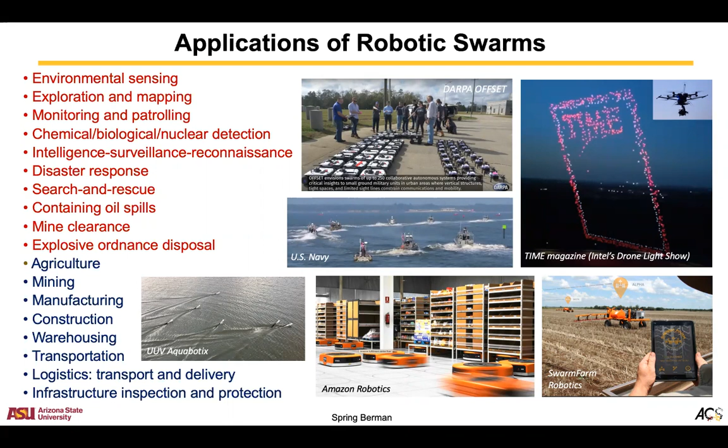Given that there's a number of possible uses for robotic swarms, the problem that we consider in my lab is how do we control them in a way that's scalable, meaning it doesn't get more complex to control the robots as the number of robots increases, and how can we ensure that their performance is reliable and that they perform the expected collective behavior.

So we consider scenarios with various challenges. Oftentimes a swarm will need to operate in denied and inaccessible environments - environments that can't be instrumented, that lack access to GPS, and that have possibly limited communication bandwidth and frequent communication dropouts. Oftentimes the robots will not have prior data about the environment that they can use to help them navigate. Some examples of such applications might be underwater, subterranean, moving through dense urban environments, search and rescue, disaster response.

Another challenge is that we want the swarm to perform robustly in the presence of robot errors and failures, and we want them to often operate over long timescales. Meaning that even though some robots might fail, there's uncertainties and stochasticity in their environment, we still want the swarm to persist and complete its mission.

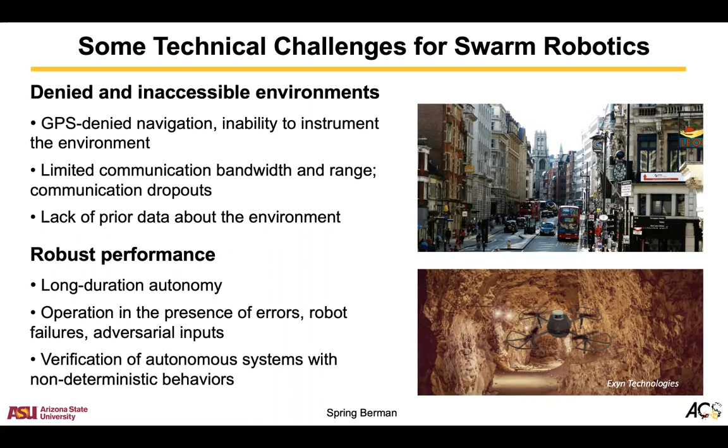So given these challenges, we often look to systems in nature which have overcome these challenges to perform complex tasks as collectives. There are many examples in biology of swarms, for instance, of social insect colonies like ants, honeybees, some species of termites.

We also see behaviors like flocking and schooling, where the individuals display this coordinated motion even though there's no leader that's telling them where to go. And even in embryonic development, in the organization of cells within a developing organism.

One thing that many of these natural swarms have in common is that the individuals in the swarm behave in what's called a decentralized manner. So they are just responding to local information that they gather via sensing or possibly communication with their neighbors.

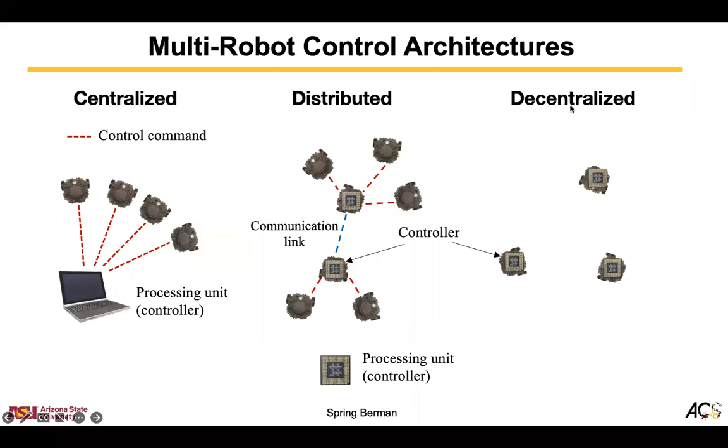You can also have distributed and decentralized strategies, which are more suitable for large numbers of robots, in which robots may be locally controlling sections of the swarm and communicating with each other, or each robot is just using its own onboard computer to decide what to do next in a completely autonomous fashion. We often use this decentralized architecture to ensure good scalability for large numbers.

In terms of communication, many existing strategies rely on some guarantees on connectivity among the agents in terms of their communication network. Most of our strategies don't rely on that. In nature, you don't often see a continuously connected communication or sensing network.

So sometimes we will rely on local sensing or local communication, so the communication or sensing network is changing over time as the robots move around, and they're just communicating or sensing within a local range. Or many of our strategies don't use any communication at all.

One way in which robots are not like individual members of a natural swarm is that we can instrument them with various sensors, and so we want to take advantage of that. In cases where it's possible, we might also want to take advantage of an overhead view of the arena in which the robots are performing.

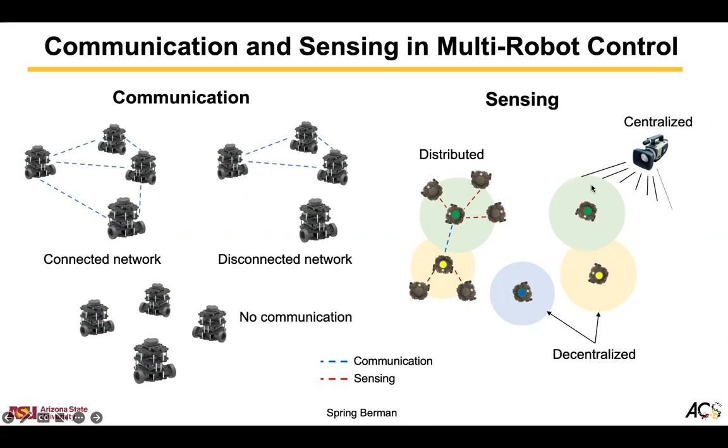I'm going to describe several different applications for swarms for which we've designed control strategies. These include spatial coverage by the swarm, including interiors and boundaries of regions of interest; task allocation of the swarm among a set of tasks, where our strategies are closely related to those for spatial coverage, as you'll see; sensing and control, where possible, of environmental fields; collision-free navigation; mapping obstacles and features of interest; and finally, collective payload transport.

So I'm going to start with the first three, and for these three types of applications, we use a multi-level modeling method that enables us to control the density of the swarm over space and possibly time.

So when they encounter a robot that's carrying a compatible piece according to the plan, they will stochastically decide to combine their pieces until they have one of two full assemblies, which they then drop on the ground.

We can consider this a well-mixed swarm in the sense that the density of robots and parts is spatially homogeneous. Because we can have an arbitrary number of robots and parts, we want our control strategy to be scalable.

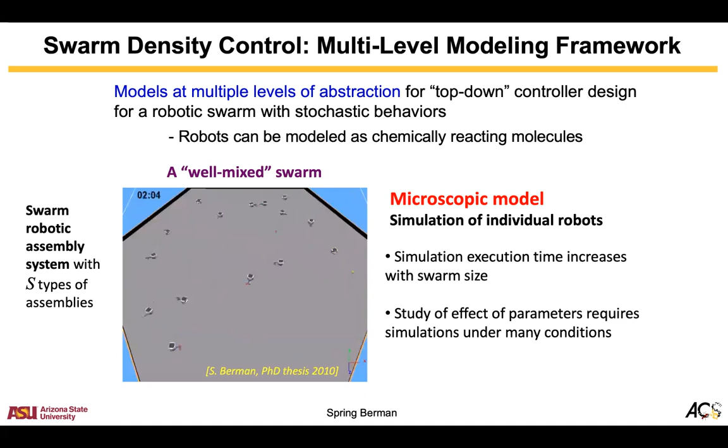If we look at a model of individuals, referred to as a microscopic model, working with that model involves increasing simulation times with increasing swarm size, and changing parameters requires simulating under a lot of different conditions, and you don't necessarily get theoretical guarantees using that type of analysis.

So instead, using the abstraction framework enabled by the control policies defined by the robots, which act similarly to chemically reacting molecules, we can abstract the swarm of individuals to a continuum given by a set of densities, each describing the density or probability density of a different type of assembly or the robots over space and time—in this case, not space, because we're modeling this as spatially homogeneous—but we can describe the evolution of these densities according to what's called a macroscopic or mean field model.

This is going to be independent of the swarm size, and of course we can apply different techniques of analysis, control, and optimization to such a model. That's going to allow us to design control policies for the individual robots.

So of course, not all swarms are going to be well mixed. We might want to model the spatial distribution as well as the distribution over time. In this case, we can model the density fields as functions of space and time, and these will evolve according to a set of partial differential equations.

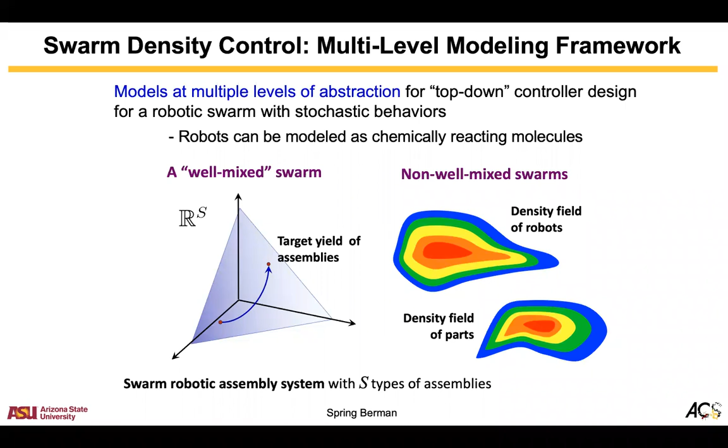This approach involves modeling at multiple levels, both the individual robots and modeling them as a continuum. We can use this for control by applying our control techniques to the macroscopic or mean field model, and then mapping the parameters onto the robot controllers.

So in this case, the design parameter is K, and we can design K for some objective. Oftentimes we're designing it for a target density field of robots at steady state, or a target density field of some other quantity.

This abstraction framework allows us to use the guarantees at the macroscopic level in order to ensure that, in expectation, the swarm is going to perform according to the evolution of the macroscopic model, which we can design via its parameters.

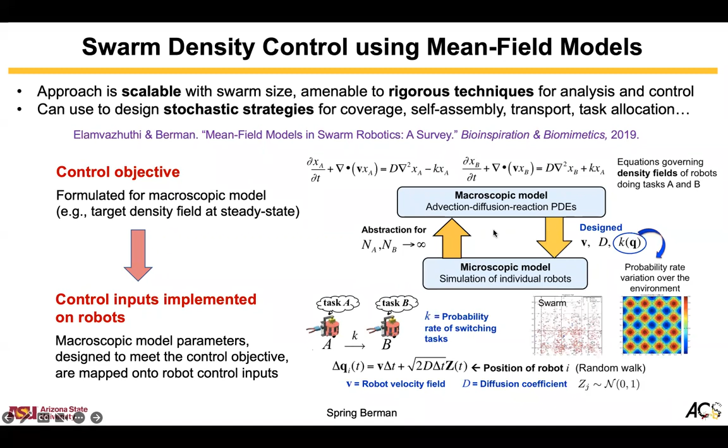Now we have these additional parameters, the velocity field and possibly the diffusion coefficient, if we can control the random behavior, the random motion of the robots. In some cases, it might just be inherent randomness in the motion that we can't actually adjust.

If we look at the mean field models, we can ensure the swarm performance by guaranteeing various properties of these models mathematically. Two of them that we consider are controllability and stabilizability.

Controllability refers to the property that the system is controllable if, given an initial condition X naught, in this case a differential equation model, ordinary differential equations, for every desired final state there exists some control input U such that the solution to this ODE model satisfies these conditions. You end up at time t at your desired end state, which again is going to be some desired distribution of robots among different states.

Stabilizability refers to the property that the system is stabilizable if, given some desired steady state distribution XD, there exists a map K such that in the closed loop system that state XD is asymptotically stable.

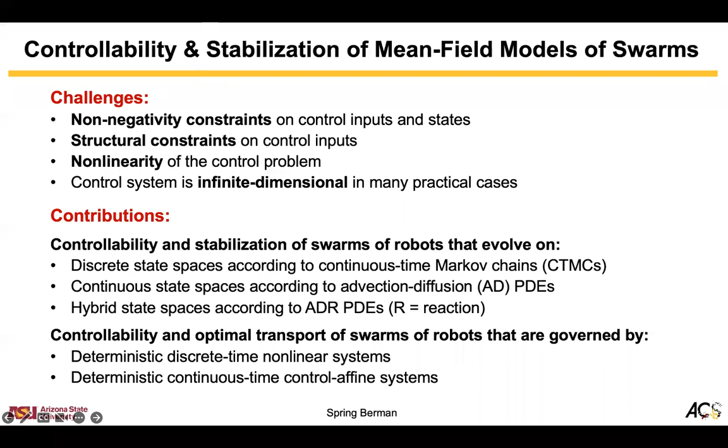So we've looked at a number of scenarios of robots that evolve on discrete or continuous spaces, just switching tasks according to continuous time Markov chains, or evolving over time according to advection diffusion PDEs. We've also looked at swarms of robots governed by different types of dynamics, and looked at the controllability and stabilization, proving those properties for those swarms. This is also summarized in that survey paper I mentioned earlier.

Okay, so given this overview, now I'll talk a little bit about our approaches to spatial coverage and task allocation that are based on the mean field model. So in this scenario, we have a swarm of robots that has to redistribute itself among a set of tasks, or alternatively, you can think of them as distributing among a set of spatial locations, discrete locations.

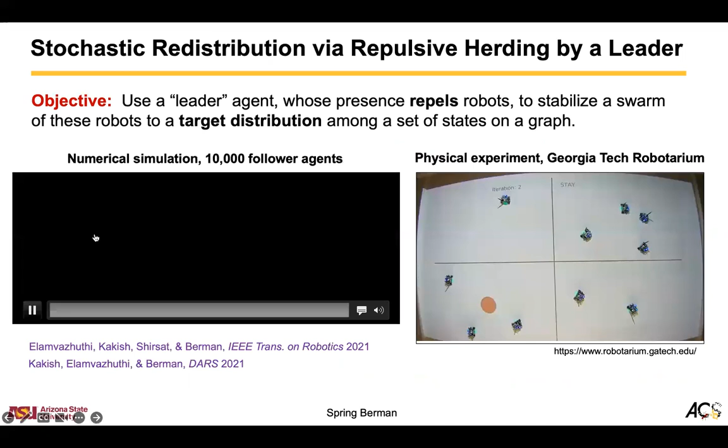So here are a couple of movies that show this strategy. On the left, actually in both cases, the leader is this dot, this red or orange dot, and it's moving across the graph, and the robots that are in its current square will then probabilistically flee to one of the neighboring squares. And over time, you can design the leader's transitions to herd the swarm into this target distribution. And so we've also used reinforcement learning techniques to design the leader's transitions in the work on the right.

Okay, so far we've looked at scenarios where robots are spontaneously transitioning between different states. But we can also describe or formulate mean field models that describe interactions between robots and each other, or between robots and some object of interest in the environment.

So we've also looked at designing stochastic control policies for boundary coverage, in which the goal is to design these probabilities of attachment to the boundary of a region and detachment from the boundary, given this catalyzing nearby robot, such that in expectation we get a target steady state density of robots around the boundary. And so if the robots recognize different types of boundaries, you can program in different reaction rate constants in order to get different coverage densities around those different regions. This kind of looks like an enzymatic chemical reaction network, so this is another possible task that can be programmed using this chemical reaction network mean field model framework.

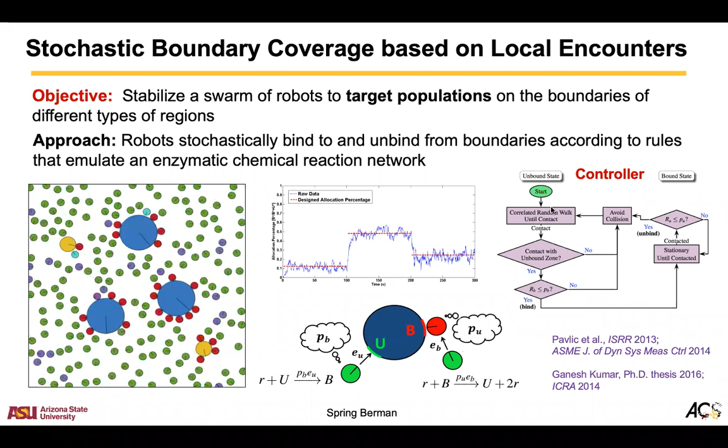Okay, so now let's add some spatial evolution to the swarm. We're going to consider cases where we have this spatially inhomogeneous swarm that's evolving over time.

In this case, the agents are diffusing, and we're modeling a swarm of nanoparticles that are moving or diffusing into a section of tumor tissue.

There are a set of reactions that govern how the nanoparticles behave, in that they will attach to the receptors in these tumor cancer cells, and they can also detach, and they can be internalized. Once they're internalized, they can release their chemotherapy drug.

And if you have a sufficient number of internalized nanoparticles in the cell, then the cell will be killed. So you can formulate this as a reaction diffusion set of equations that describe the nanoparticles in their different states.

And you can design an optimization problem to design a particular parameter, which would be something that you could design for the nanoparticles in order to control their binding rates over space, such that you get a target number of internalized nanoparticles in each of a line of cells.

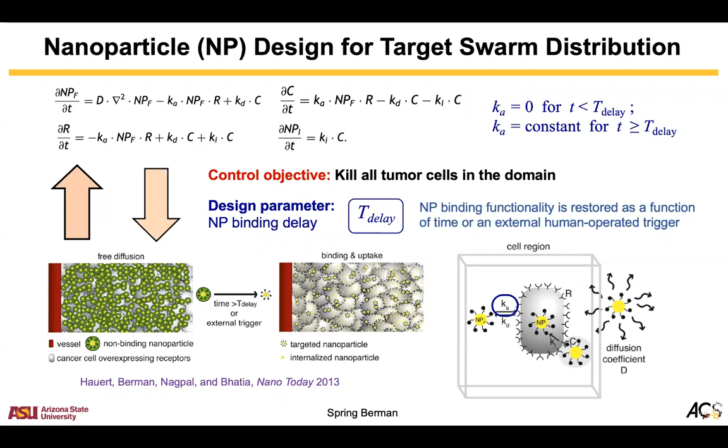So this is another type of problem. We can control the spatial distribution of agents over a domain.

We've also looked at applying this mean field control framework to sensing and control of environmental fields. I'll talk about a sensing problem first. In this scenario, we have a scalar environmental field.

And we have robots that can take sensor measurements at their location of the value of that scalar field. So we want the swarm to stabilize to a target density where that target density is proportional to the scalar field. And so we're going to design the robot's diffusion coefficient, and we can define it simply as proportional to the inverse of the field.

So as the swarm disperses, it's going to measure the field, and then it's going to control its random motion, such that if the field is higher, they're going to move slower. If it's lower, they'll move faster. And so they're going to end up aggregating at hotspots in this field. Overall, the steady state distribution of the swarm is going to, in a sense, reveal the underlying environmental field.

And this was also done as superimposed trials because we didn't account for inter-robot collision avoidance, which of course we'd have to do in practice. But using just a single robot, multiple trials, we could show that this control strategy performs as expected.

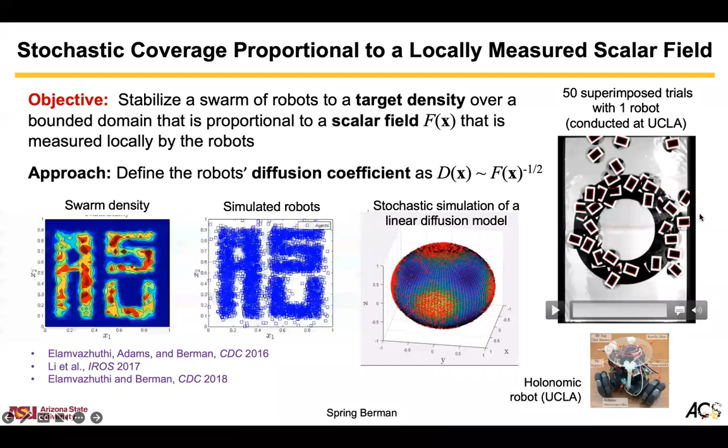So we can also think about scenarios where the robots are producing some activity and we want to control the distribution of such an activity. Maybe this is something like sensor measurements, or in this particular case, it's pollination activity.

So here we imagine a swarm of robotic bees that are deployed over a crop field. The field has different rows with different cultivars or varieties of the crop. And so we want to control the spatial distribution of robot visits to flowers within these crops.

Maybe in rows one and row two, we want different levels of pollination activity. So we can design the robots to have this reaction-like effect on visiting. They have some rate of hovering, deciding to hover at a flower, which depends on the type of flower. And once they hover, then we can record that as a robot visit, which affects pollination.

Then they can transition from hovering to flying at some rate k-fly. And we also model their motion as a combination of a controllable velocity field, which can vary with time, and some uncontrollable random motion. And so we can formulate an optimal control problem to compute the velocity field and their rate of hovering.

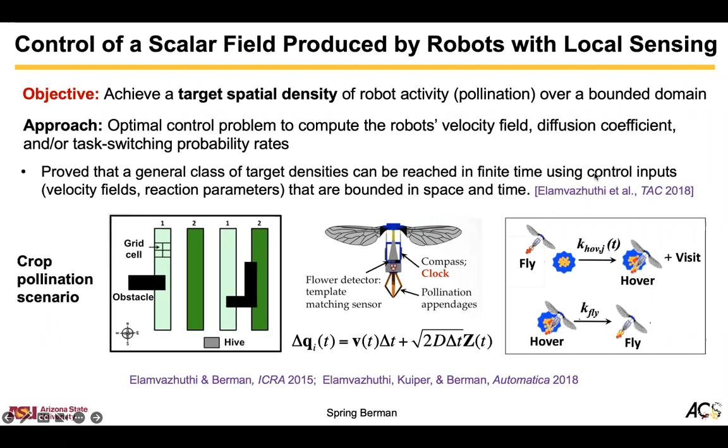So here's an example of two different target steady state densities of flower visits. In the one here in the middle, we want a uniform pollination across all the rows, but there's two different desired densities of pollination between rows 1 and 2. And on the right, we want only the rightmost two rows to be uniformly pollinated.

So these, you can see that they don't exactly go to the desired distributions because there's some fluctuations in the density. This is typical of these stochastic control strategies. The idea is that if you ran a number of trials and then averaged the resulting densities, they should follow the solution of the corresponding mean field model. But they do give a lot of versatility in terms of the outcome by just changing two parameters of the robot's controllers.

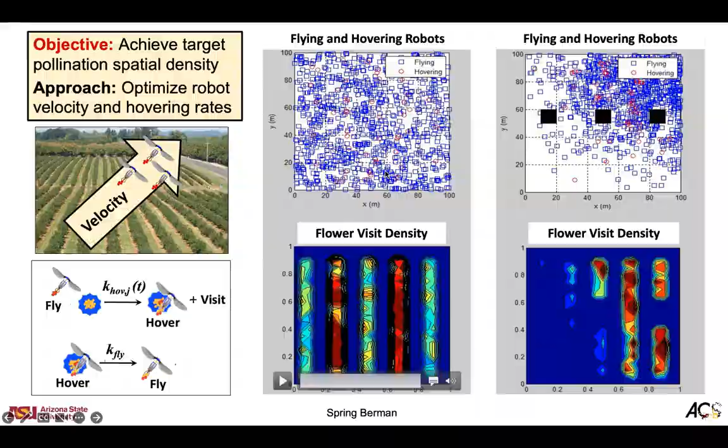And then finally here, we have some more recent work on the case where you have a swarm of robots that's indirectly affecting an environmental field. You're trying to control parameters of the robots in order to achieve a target environmental field, or target spatial density of the field, a target profile over space. In this case, we're envisioning an underwater swarm with onboard actuators that act as a source in the field, so they can locally increase the field, and we can control the source intensity as well as the robot's velocity.

And so we showed that you can indeed control the field in order to achieve various outcomes. For instance, regulating the density of the field in the event that without control, the field would just diffuse to zero everywhere.

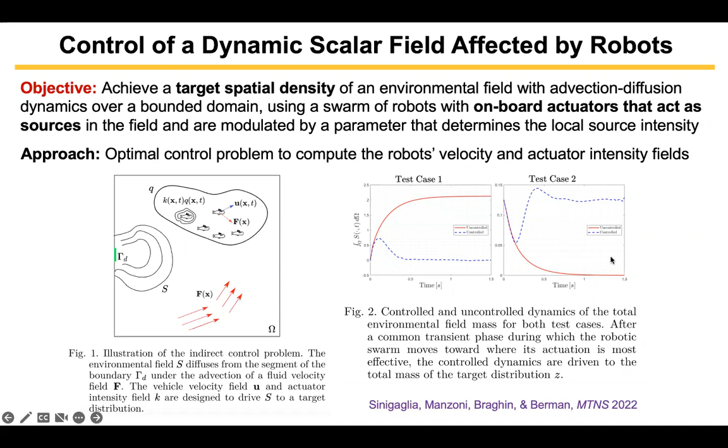As I mentioned, there is going to be some fluctuation around the expected mean field model solution. So we've done some investigation of quantifying the error between the mean field model that we're using for control and the microscopic model, the densities that evolve from that model. This was done with our colleague, Andrea Bertozzi, and her student. We looked at how we could, for instance, choose the number of robots and their sensing radius to achieve coverage, like in this pollination scenario, within a specified error. Here we're trying to account for the fact that there is a discrepancy between the mean field model and the microscopic model, and trying to potentially minimize that with the design of our swarm size and their sensing radius.

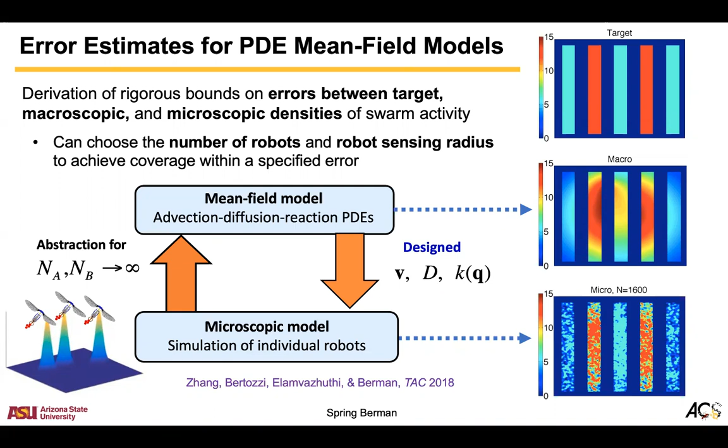Okay, so next I'm going to talk about collision-free navigation. Now we're going to move on from the mean field model description to other methods of optimization and control. We're going to be directly controlling individual robots here, rather than controlling a continuous density field.

We've looked at various problems of robots that need to navigate through an unknown environment in which there might be obstacles. Some of our strategies employ what are called potential fields that are constructed to enforce a kind of attractive or repulsive effect on robots that changes with their distance from the obstacle, and potentially from the goal point. There's been work on what are called navigation functions that are defined over a known environment that can produce these potential-based control laws.

Here, we're considering a case where the environment is unknown. We just know that the obstacles are convex, the environment is unbounded, and we want the robot to attain a target velocity while avoiding the obstacles. We also don't want it to get stuck between obstacles. So the robot has no GPS. It can measure its own velocity heading and its minimum distance from obstacles in its local sensing range.

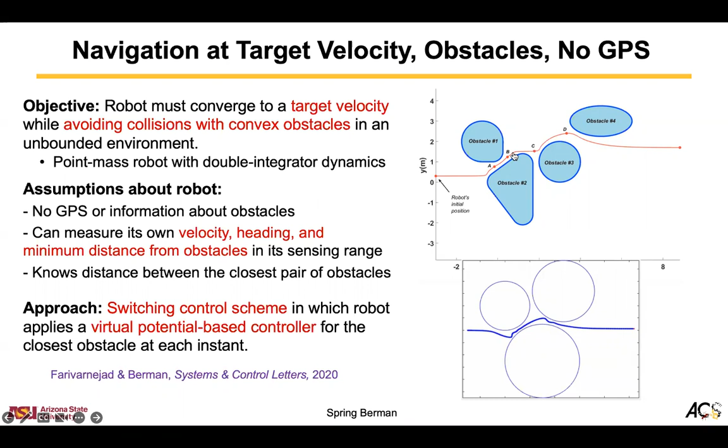So we can also consider the case where the robot needs to converge to a target position. Again, it has to move through unknown obstacles. In this case, it has GPS, so it knows where it is in the environment. Again, the obstacles are convex. The robot can measure its position as well as its velocity, heading, and minimum distance from the obstacles. So we defined a new type of potential function that can be used in the controller. It functions somewhat like navigation functions, but it does not require knowledge of the obstacles and their locations and geometry.

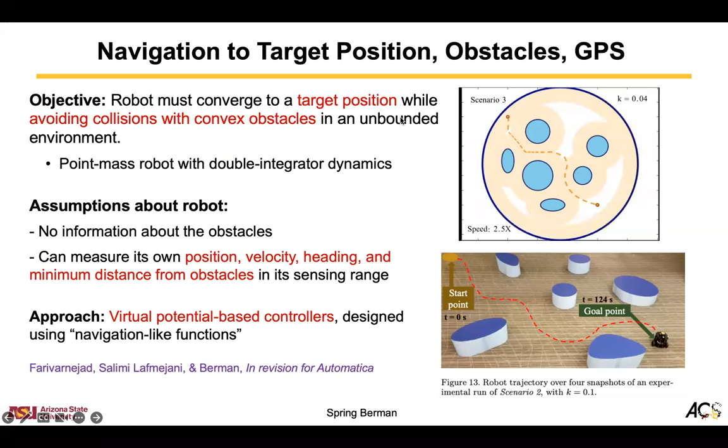All right, so these were designed for a single robot, with the potential future work that we could add multiple robots in those cases, potentially a team of robots that's moving an object through an obstacle field.

So we also recently considered the case where you have multiple robots, they don't have GPS, and they have to move through a field of obstacles that can be static or they could be moving, not too fast, but still they can be moving. And we want to ensure that they can reach their target positions without colliding with anything.

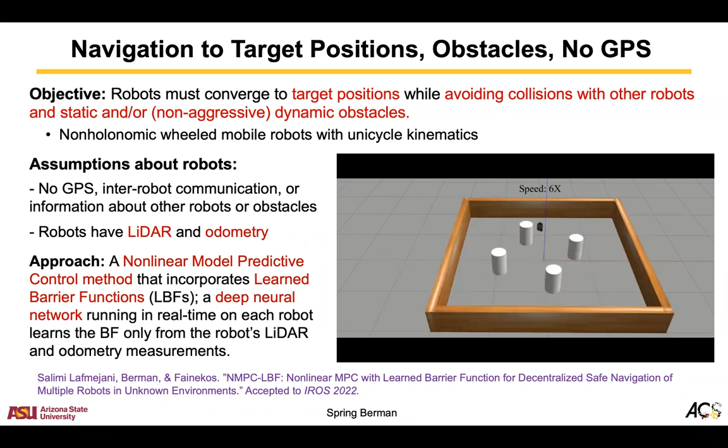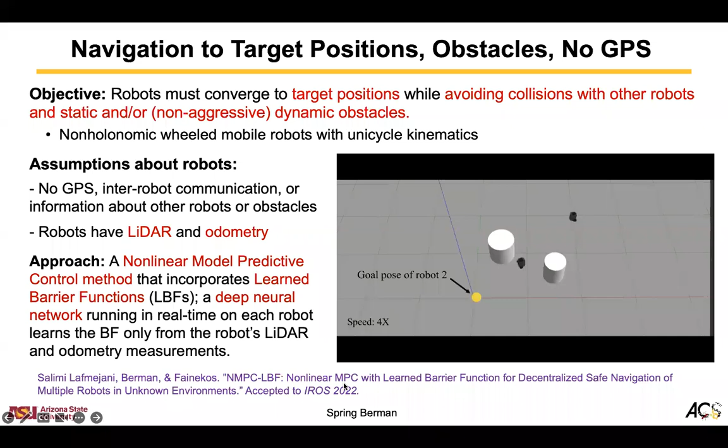So here we have these restrictions on the robot's capabilities and information. Here they have LiDAR and odometry, and the approach that we used is a nonlinear model predictive control method that incorporates barrier functions, which describe the boundary between the safe and unsafe sets in which the robot can be. And the robots are learning the barrier functions using a deep neural network, using only their own measurements to do that. So this is going to appear in IROS this year.

Okay, so now I'll talk about some strategies that we've used for mapping environments, in particular mapping obstacles and features of interest. Two approaches that we've used are based on the concept of consensus, in that we think about designing robots' control policies such that they are sharing information with other robots, and we design these protocols in order to guarantee that all the robots will converge to the same information. In this case, the information is a map of the environment, represented as an occupancy grid map.

So the robots are exploring the environment, and they have local communication, so when robots are within a communication range, they can exchange their maps. In this case, the robots are following Levy walks in which their heading is determined by a metric that maximizes new information, and they can measure their distance, for instance using LiDAR, to nearby objects.

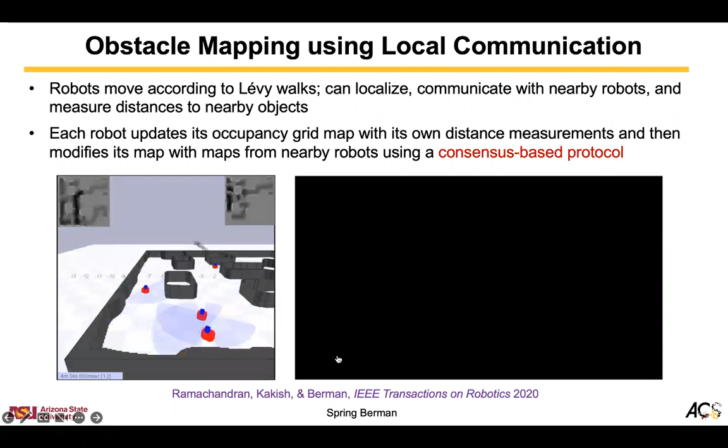So we can show that the robots, under a particular consensus-based protocol, will all converge to the same occupancy grid map over time. The robots can start out in different places, and they'll have initially different maps with different unknown sections, as shown here in the simulation. Then as time goes on, they will converge to the same map.

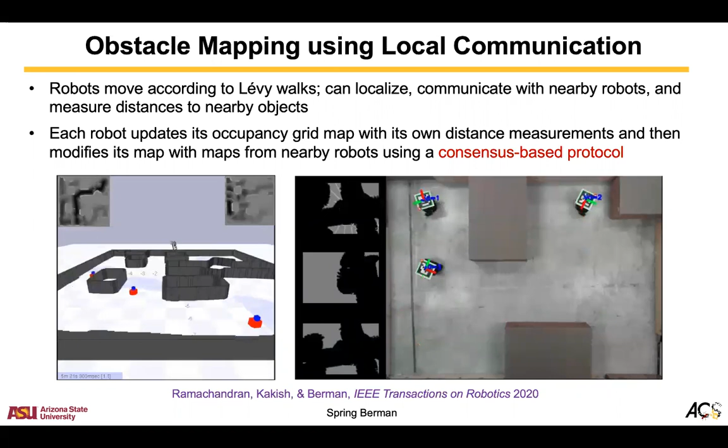So this is basically a dynamic consensus protocol, it's time-varying consensus, and we need an assumption that there's some connectivity requirements, so there's some time interval over which the network remains connected.

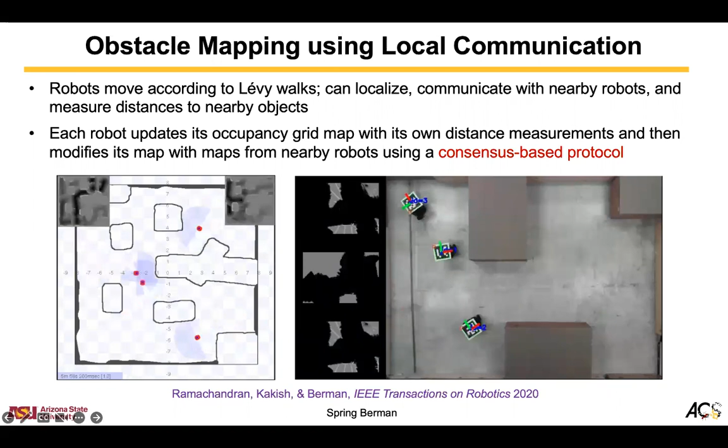So we also can relax that assumption about connectivity and have no requirements. We looked at a case where the robots move on a discrete grid according to a Markov chain, so they can just move left, right, up, down. Here they're reconstructing a discrete distribution, or a distribution of discrete features, which is also modeled as an occupancy grid map.

Again, we use a consensus-based protocol based on distributed Chernoff fusion, and using that we can show that eventually all the occupancy grid maps are going to converge to the same map. And again, in this case, we don't have any requirements on the communication network.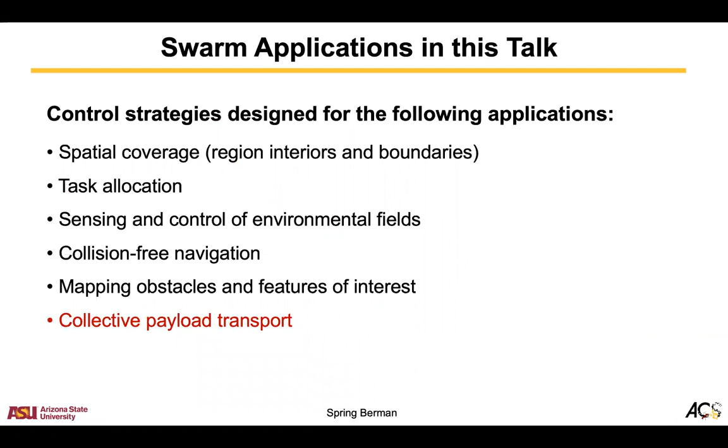All right, so finally I'm going to discuss some methods that we've developed for the problem of collective payload transport. So here we're thinking about robots that are interacting as a team with a large or bulky object, and they have to cooperatively move that object to a target location or move it at a target velocity. There are various applications for this task in different scenarios, and for a survey on collective transport in multi-robot systems, we have this paper that just came out this year.

So we're inspired by the behavior of group food retrieval in certain species of ants, because they've basically solved the problem of retrieving some large item as a team in a way that's scalable with the number of individuals. They're only relying on local information, such as responding to the tractive resistance of the load as it's being pulled around by other individuals. This species in particular, shown in the video, doesn't use pheromone trails to transport, although they use pheromones to recruit other ants to the food.

And as you can see, they can move this piece of food over rocky terrain and around plants, so it's a very diverse range of environments, and they can get the food back to their nest.

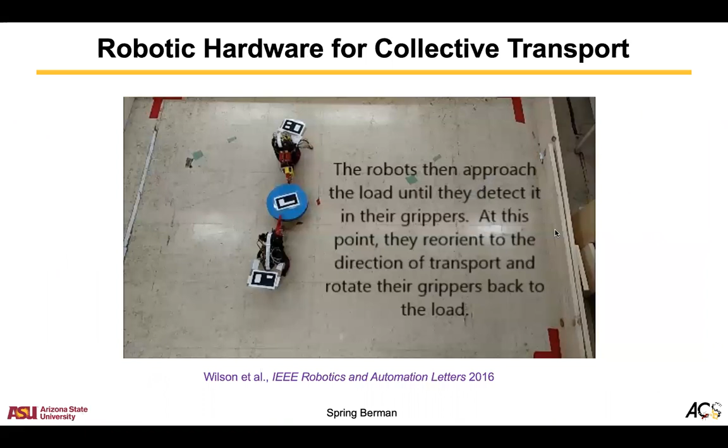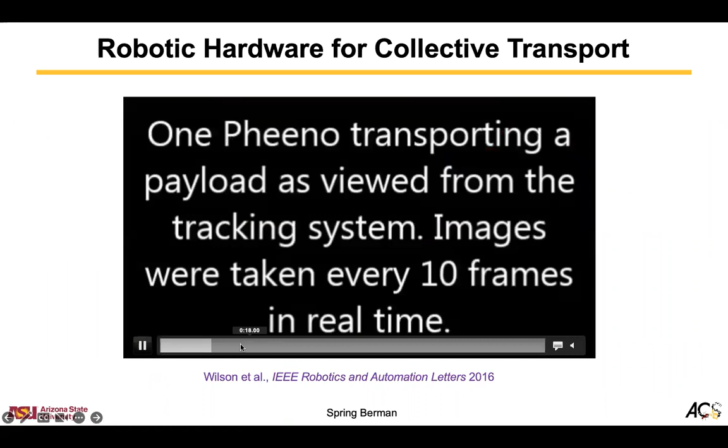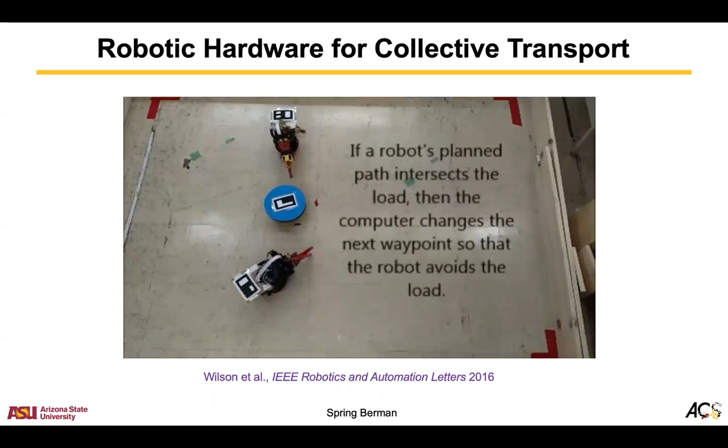So we developed a platform a while back for testing collective transport, and this platform is called Pheeno. We have Pheeno with a gripper that has multiple degrees of freedom, and we tested various capabilities of Pheeno to move towards an object, orient itself in the correct position to grasp it, and then grasp and lift the object. These were some of our early experiments.

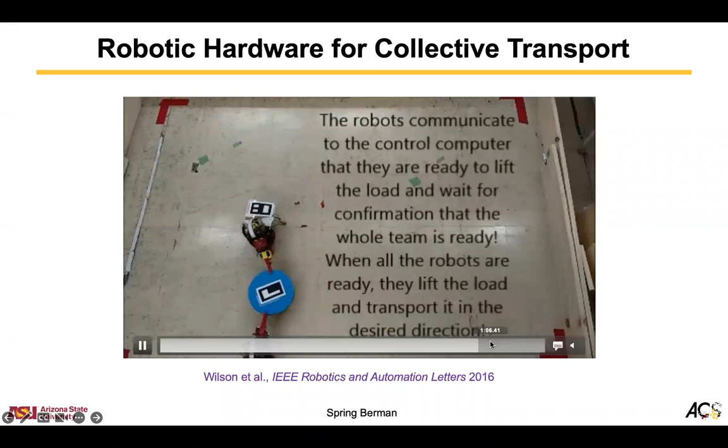Just to illustrate a possible setup of how we can do this with small, relatively inexpensive robot platforms: we collaborated with some social insect researchers at ASU, including Stephen Pratt, who had experimental data on ant colonies retrieving different fake food items. Here, the food item is a dime glued to a piece of foam, smeared with fig paste so the ants think it's food.

Given this experimental data, we developed a stochastic hybrid system model to describe the behaviors of the ants, both in terms of their transitions between different states and the dynamics of the ant-load system together. We fit the parameters of our model to the experimental data to mimic the dynamics of the ant transport over time.

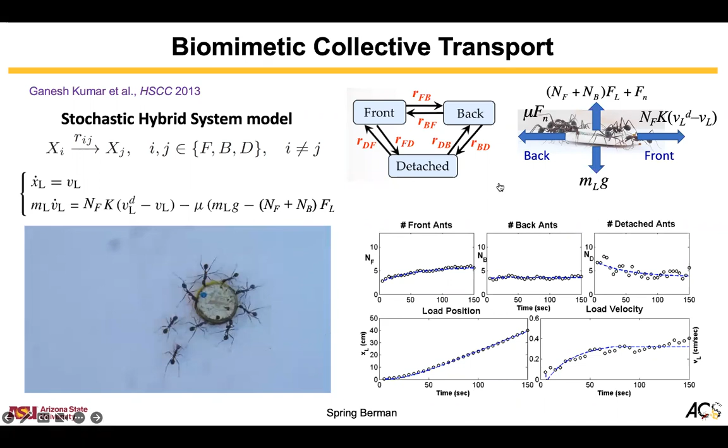We also adapted that model to our stochastic boundary coverage strategy, which I showed earlier. We designed the rules such that the robots had these ant-like rates of attaching and detaching, and could move the load to a specified velocity. In this way, we replicated some ant-like dynamics in the transport.

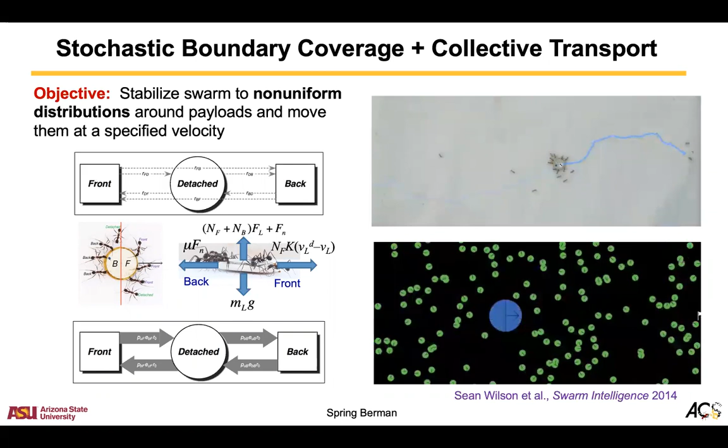We also looked at other experimental data from our collaborators, in which they enforced one-directional motion of the transport to simplify the process. They did this by creating a raft of straws, and the ants can only pull it in one direction, to the left, by pulling on these little threads.

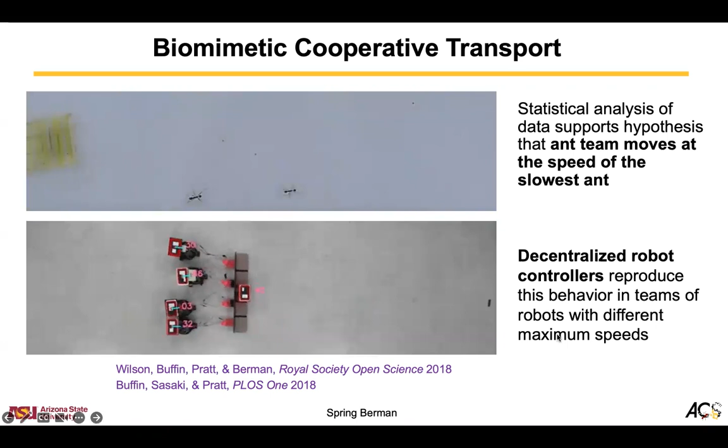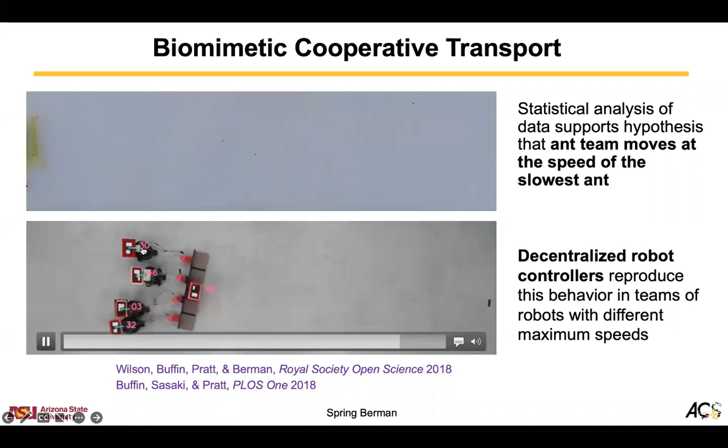What our collaborators observed is that if the ant population changed, so if you had 2, 3, or 4 ants, the ant team would end up moving at the speed of the slowest ant. So we tried to model a mechanism by which this would happen and replicate it in our robots. We came up with a simple strategy illustrating that if robots are moving with different maximum speeds, under this strategy they would eventually converge to the speed of the slowest robot.

Of course, this might not be the optimum strategy in a situation where you know the environment, like in a warehouse or a factory, where you'd want to optimize speed or efficiency of transport. But it might work well in unknown environments with a lot of uncertainty, where you want to preserve some of the robot's power so they don't burn out by pulling too fast. The whole team can still make progress, even though some are less capable than others.

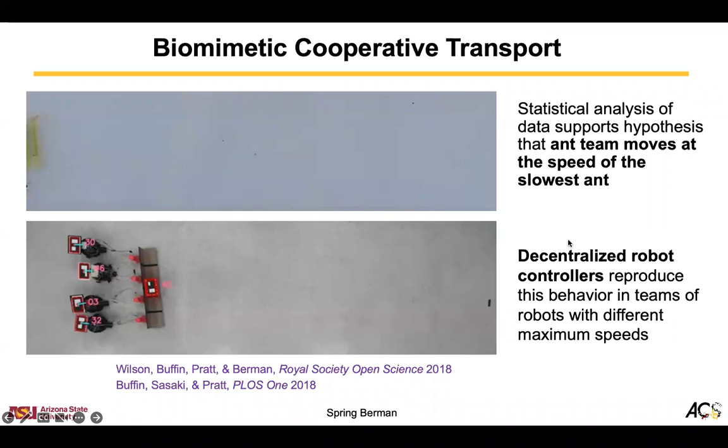Finally, I'll talk a bit about our other collective transport strategies. These are more loosely bio-inspired, in that they respect the same constraints: robots are not communicating with each other, and don't have information about the environment or other robots. In this case, they don't have GPS. They're able to measure their velocity and heading, and their manipulator angle and angular velocity.

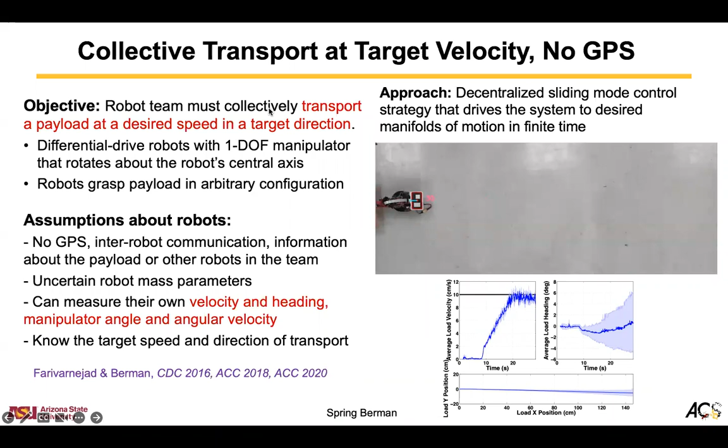Here we use a sliding mode control strategy that we can prove drives the system to the desired speed and heading in finite time. We illustrate this with experiments as well as simulations. The robots can be in any configuration around the payload.

We also developed an approach using adaptive robot controllers for a system with uncertain mass parameters that stabilize the system again to a target velocity, and we account for the holonomic constraints between the robots and payload.

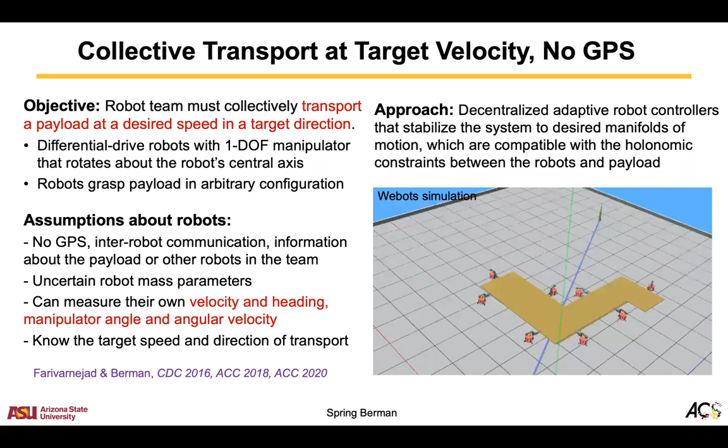We've also done some other work not shown here on collective transport in 3 dimensions, and also collective transport to a target position using a proportional derivative control strategy. We looked at the effect of the distribution of robots around the load on the resulting error in the position and desired orientation.

Okay, so that concludes my talk on our control strategies for robotic swarms in uncertain environments.

And this was also validated on an experimental platform of a small robot arm with these hydrogel-based actuators that shrink and expand as the temperature changes.

We also have an ongoing project on designing autonomous vehicle controllers that are designed in such a way that the responses they produce align with human values and moral priorities, especially in dynamic, unexpected situations like an unanticipated crash scenario.